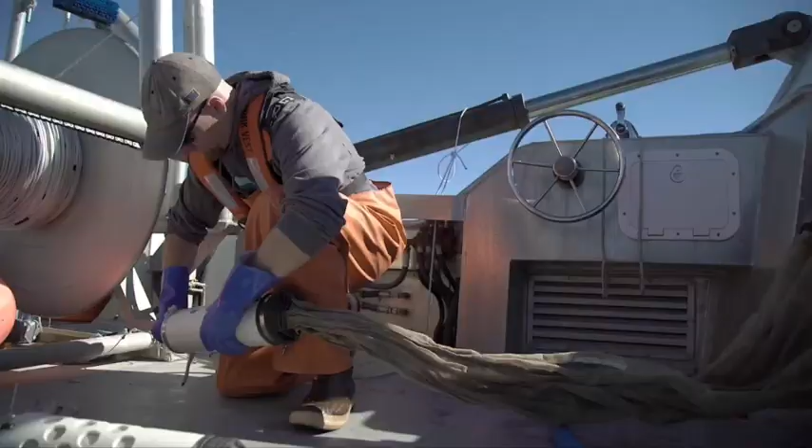for decades to come. Dr. Rob Campbell is a biological oceanographer for the Prince William Sound Science Center, and he has been monitoring the effects of the oil spill on the local environment for the past 15 years. He currently utilizes a Wet Labs Thetis profiler equipped with a wide variety of sensors to track the plankton population,

water metrics, and nutrient levels of a vertical water column within the sound. The profiler is powered by a battery which allows around 6 weeks of daily profiles, but battery degradation has reduced the operating duration to a mere 3 weeks, and service and repairs are not feasible because the profiler is no longer supported by the OEM. Recharging the profiler takes a full day of work and prevents him from completing his other duties.

To this end, he's requested the development of a new profiler that should improve on all aspects of the previous design. At Georgia Tech, Dr. Michael West has overseen engineering design teams working towards creating the replacement profiler. Previous teams' work include improving the profiler's hydrodynamics and upgrading data communication capabilities.

Our team, the Prince William Sound Profilers, is committed to designing the new and improved profiler. We are Lauren Zoe, Peter Wilson, Lucas Ray, Zee Wee, Ben Goss, and Rachel Wallace.

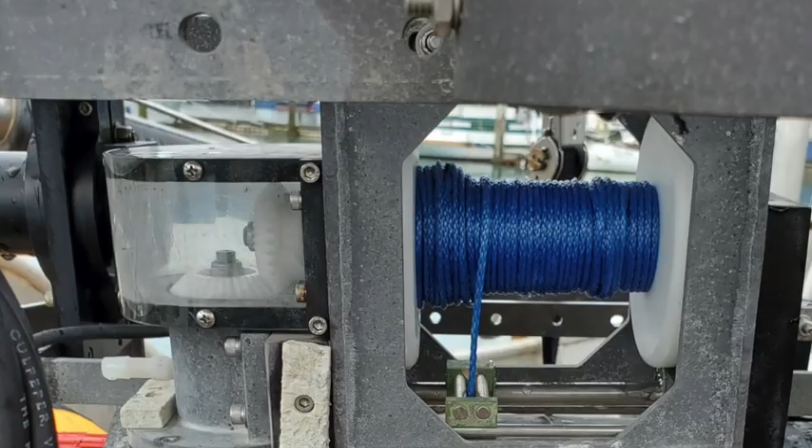Dr. Campbell has determined that the main power draw is the motorized winch system that hauls the profiler up and down the water column. Playing to the strengths of our interdisciplinary team of mechanical and electrical engineers, the Prince William Sound Profilers have focused on designing an improved, more efficient subsea winch to boost the profiler's operational lifetime.

Beyond reducing power consumption, other problems with the current profiler could be alleviated by our new winch design. The current winch is limited to holding enough tether to allow the profiler to explore down to a 100-meter depth, and Dr. Campbell would like to increase profiling capabilities to 200 meters.

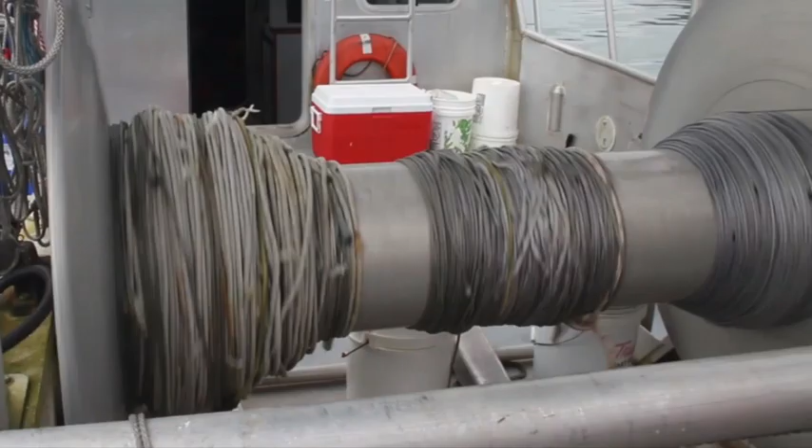The current winch also has an ineffective braking mechanism that is easily overcome by the force of the waves when the profiler is parked at the surface for data transmission. Additionally, the current winch unspools at a constant RPM, causing the profiler to travel at varying velocities depending on the changing spool diameter. This interferes with the accuracy of its plankton identification software.

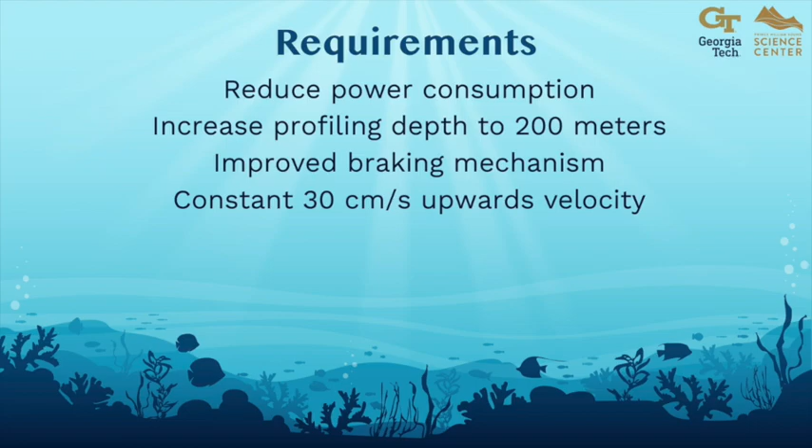Based off its plankton camera's resolution and sampling frequency, the new winch must be able to maintain a constant 30 cm per second upward velocity. Finally, because the winch will be operating in subsea saltwater conditions, it must be capable of working in the corrosive environment and be resistant to fouling.

With regards to the entire winch redesign, the team prioritized ease of service and replaceability when choosing components and selecting materials to maximize the longevity of our winch.

Based off the feedback from our advisors, we decided on a completely submersible model. This design utilizes non-corrosive materials like Delrin plastic and anodized 6061 aluminum to avoid the need for pressure vessels, and includes easily sourced replacement components.

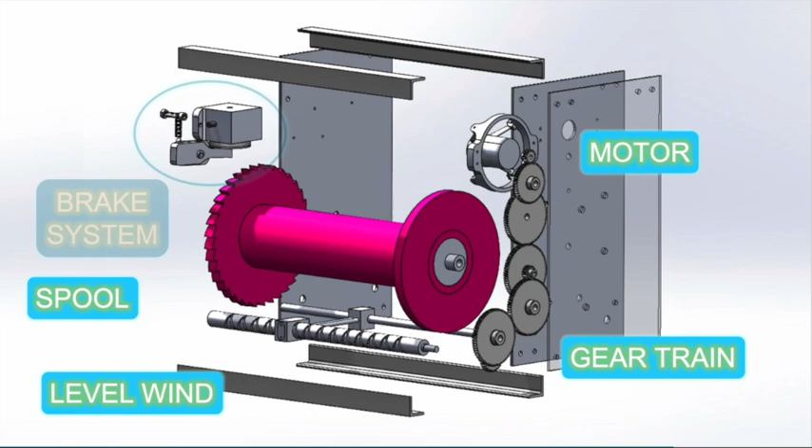Within the winch, there are 5 major subsystems. The motor powers the winch and drives the gear train. The gear train reduces the motor RPM to turn the spool, then further reduces the RPM to turn the level wind, which guides the tether evenly onto the spool. Additionally, a brake system is included to prevent unwanted slippage of the tether.

The motor that we decided to use as the mechanical power source for the winch is the Blue Robotics ROV thruster motor.

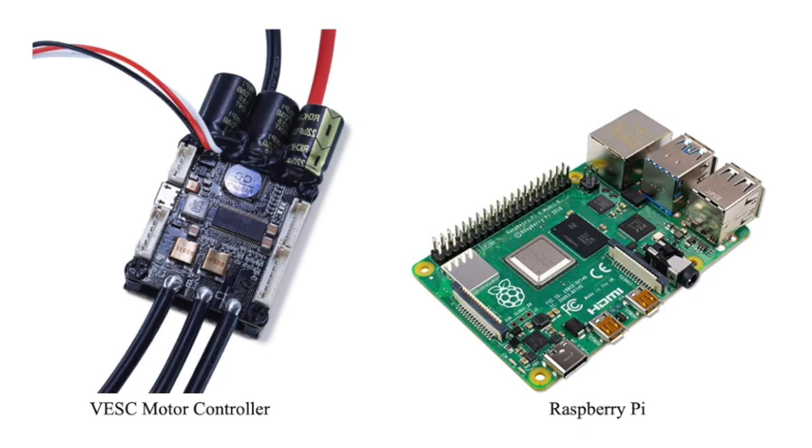Made for subsea applications, it avoids the need for a pressure vessel and has more than enough power to drive the winch. It is controlled by an open-source VESC motor controller and a Raspberry Pi.

The gear train for the winch was developed in conjunction with the motor. We parameterized both components to find the optimal design to hold 250 meters of tether, run at an efficient motor RPM, and achieve the necessary gear reduction and torque.

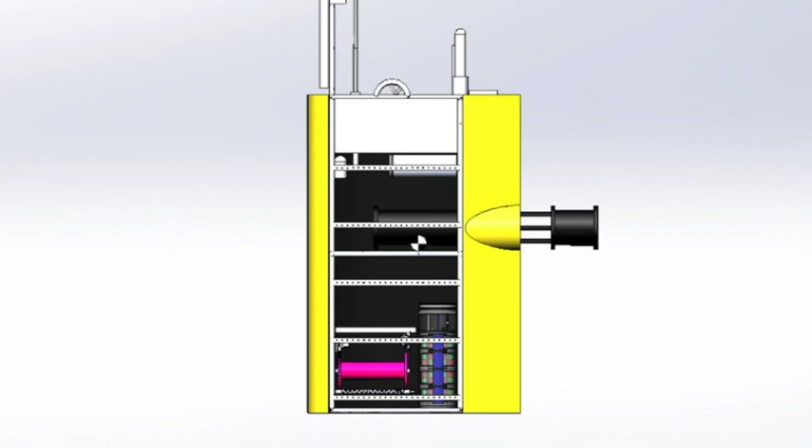The winch system had a 40 by 35 by 20 centimeter footprint and fits comfortably within the previous team's hydrofoil design at the bottom of the profiler. This positioning ensures that the center of mass remains as low as possible to maintain the profiler's upright orientation in the water. With regards to tether material, we selected Spectra fiber rope, which has high strength and low elasticity.

To mitigate tangling and improve the reliability of the system, we designed a level wind that will distribute the rope evenly onto the spool. The braking system, controlled by a waterproofed electromagnet, uses a parking pawl to allow freedom of motion in the reeling direction and has a normally active fail-safe design to improve braking and reduce power consumption.

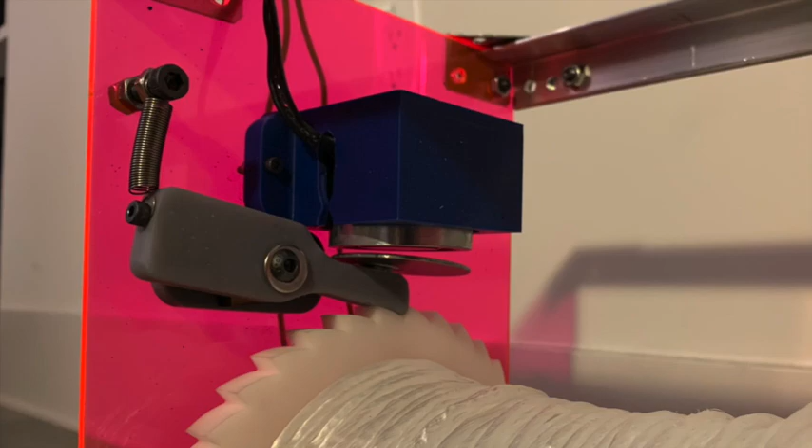The level wind axle and chassis will be manufactured from aluminum, while the gears, spool, mounting components, and other level wind components will be manufactured from Delrin.

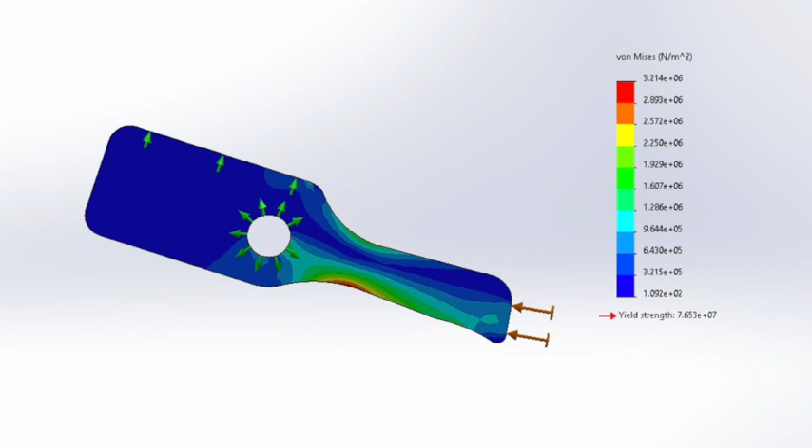In order to validate the design of the parking pawl during nominal operating conditions, a static 2D finite element analysis was performed. The pawl was subjected to a distributed compressive load derived from a 90 Newton buoyant force caused by the profiler and was stabilized by a roller constraint on the top back face.

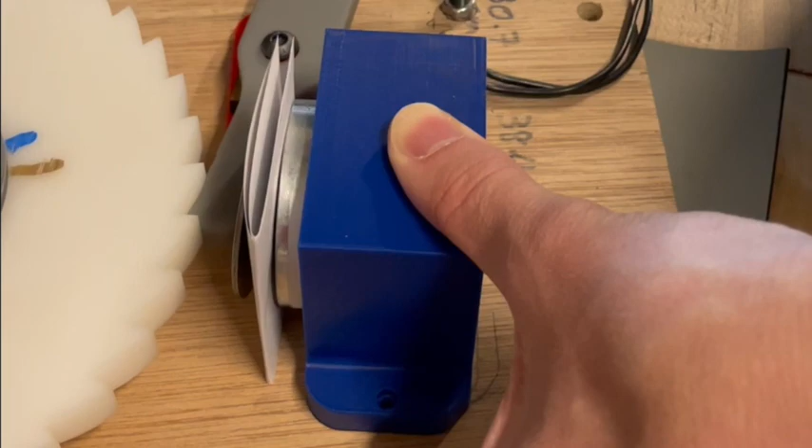The FEA showed that the maximum von Mises stress concentration of 3.2 megapascals occurred along the bottom edge of the pawl, which is only 4.2% of Delrin's yield strength. Although FEA results should never be taken at face value without physical testing, the magnitude of the difference provides us the confidence that the pawl will not fail under braking loads.

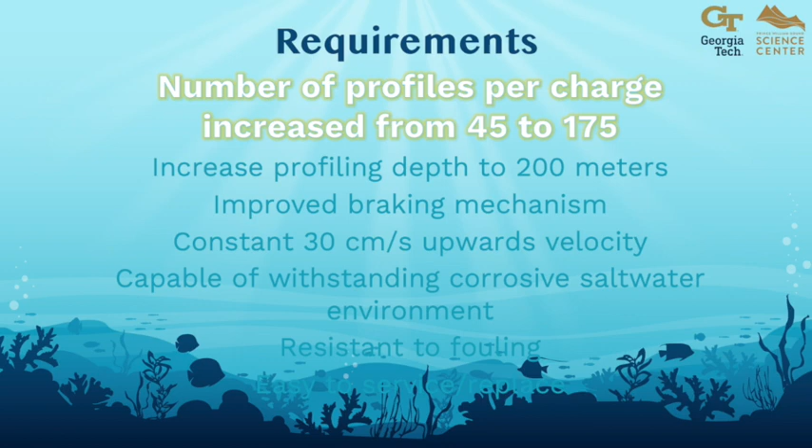To examine how our winch design meets the design requirements, we've determined that it exceeds target specifications. Following energy calculations, we find that our improved design is capable of increasing the amount of profiles per charge from 45 to 175. Our spool is capable of holding the 250 meters of tether, and the pawl brake prevents slippage.

Without access to the profiler's pressure sensor, we were not able to develop or validate a mechanism to maintain a 30 cm per second ascent velocity, but with our motor controller and onboard encoder, it is a feasible task for a future team to implement.

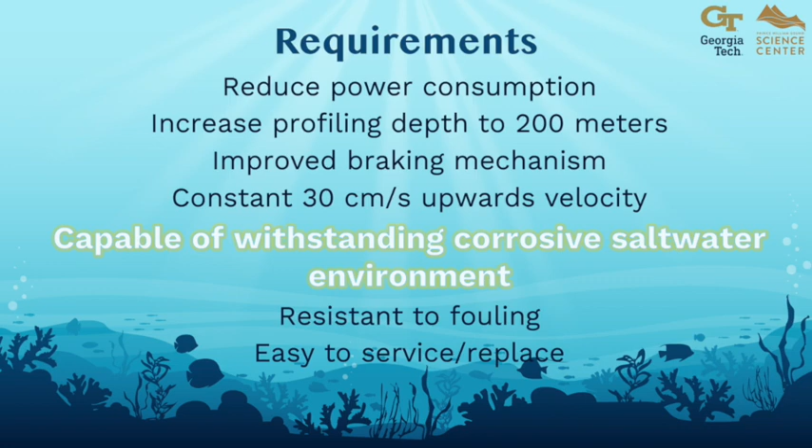Our material selection also makes our winch resistant to the subsea environment. For ease of service, our winch is easily maintainable with open source control electronics and parts from common vendors.

With our new winch, the profiler will collect data more accurately and efficiently, and will now only need to be serviced once every 3 months compared to its current need of once every 3 weeks.

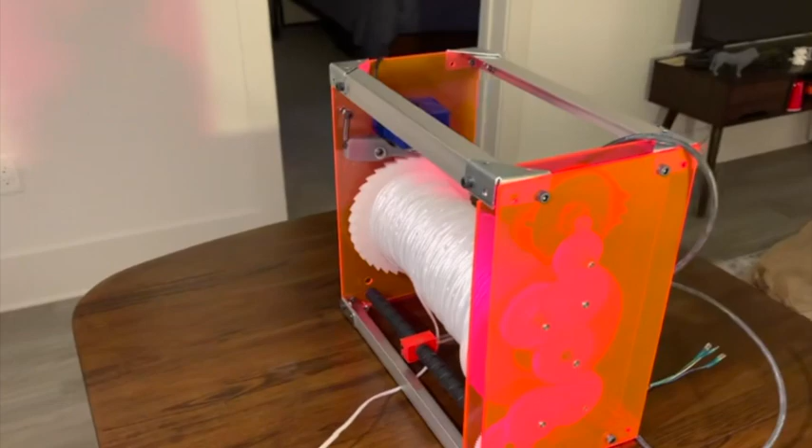The cost estimate for our winch is $25,000, where a custom subsea winch designed by an established manufacturer was quoted to be $50,000. At this time, we recognize that there is still more work to be done surrounding the winch.

Future teams will need to integrate the winch control electronics with the necessary sensor interfaces to create the final electrical system. The winch will also need to be mounted and tested at 100+ meter depths to fine-tune the controller and identify other unexpected issues.

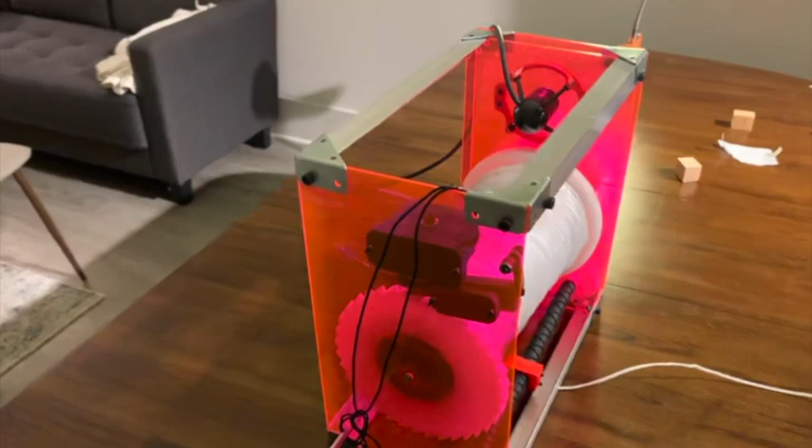With our team's contribution, this new profiling vehicle will allow scientists to continue monitoring the incredible ecosystem of the Prince William Sound.